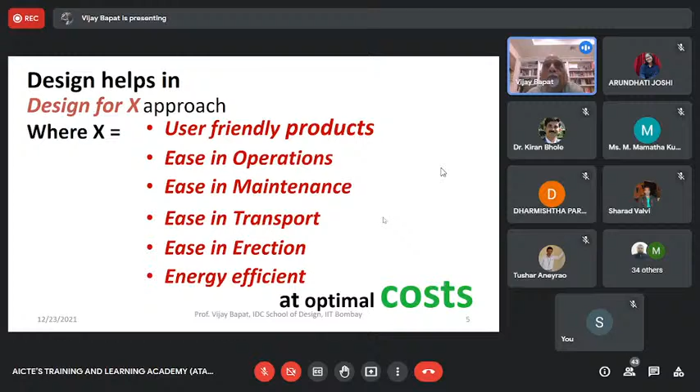Why is design and innovation becoming so important today? Let me talk a little bit about that. Because of globalization and e-marketing, now anybody sitting in any corner of the world can just click a few buttons and find out which product is available in Africa or a desert, identify this as a problem, and come out with a very good innovative product.

There is a crank, and there is a morse taper collet in the front, and this whole small gadget is to be mounted on a pedestal grinder.

Then you adjust the angle once, and the operator has to put the drill in the front and rotate the handles, and you will get a perfect, very sharp tip. Fantastic innovation.

But when we, the product design people, started looking at this, we said the human aspect is overlooked. This is working, this is phenomenal.

You have the proper gear ratio to get optimal rotation and all that, but the operator is far away and is rotating the crank, while the actual drill tip—the main focus point—he can't see because it is far away. There is a visual disconnect between the actual process and what you are doing.

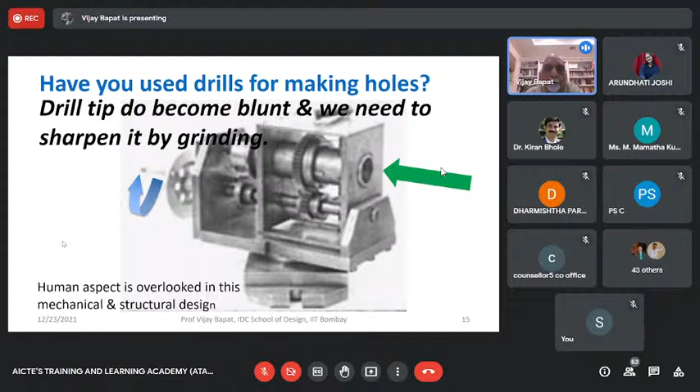So we started working on this, and design helps in developing products with added value—products that are aesthetically appealing, user friendly, and very simple to use.

So the same drill tip grinding that the design team worked on - now the whole machine is very compact. Instead of using the morse taper collet in the front, we adopted a self-centering chuck because many of our drills are parallel shaft. We brought the crank to the side, making it very easy to operate with a visual connection to what you are working on. Now this becomes a saleable product.

So I can say design is like an insurance policy for success. It will sell in the market.

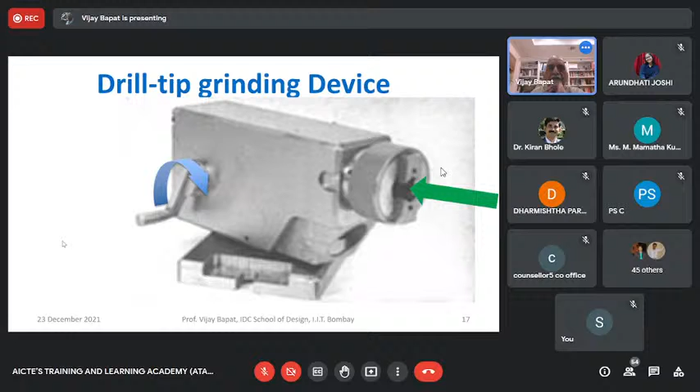Design and technology are inseparable. They are like two sides of a coin. If the rupee is to be a currency, it must have a head as well as a tail. If one side is missing, then it is a bad rupee, and only Amitabh Bachchan can use it, like in Sholay - you must remember that famous shot where he uses the coin for tossing. They have two sides of the same coin, and only then will it be successful. Your product will be successful.

I'm going to show you a very simple but important product: adhesive tape for medical application. We all use this sellotape. It's a wonderful product having a sticky surface on one side. It's made with plastic, but if sellotape is in a typical simple roll, then you need a cutting device.

Another problem with sellotape is that if you forget to put some innovative thing, like a matchstick or a U-clip, it's so difficult to locate your starting point. You must have a very sharp finger to find where it starts, and then use scissors or a cutter to cut it. It's a fantastic product, but quite difficult to use unless you take care to identify the starting point. But a small throwaway dispenser, just an injection molded piece, makes your life easy. Phenomenal - we use it day in and day out.

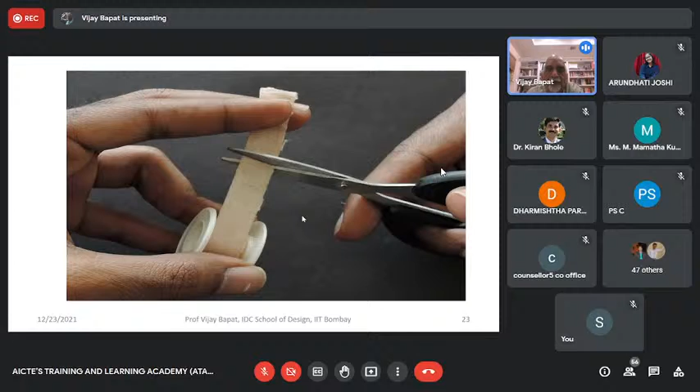So the problem was identified, and then another fantastic product was introduced for self-help: the band-aid. It's like a small piece, nicely packed - you just open it and put it on small cuts. But if the wound is big, you must rush to the hospital, where they apply medicine, put on cotton balls, and then put this cloth tape. That's the process used today.

3M company, a fantastic innovative company - they keep introducing products that make our lives easy. We know the self-sticky yellow note.

They came out with a fantastic product which is actually a paper-based product having thousands of micropores. You can just use your hands to tear it, and use whatever length you need. Very impressive.

But I was more impressed not by the micropore tape, but by another product: Transpore tape. Look at the cut possible - it gives you a clean cut. It's a plastic based product, but there are many holes.

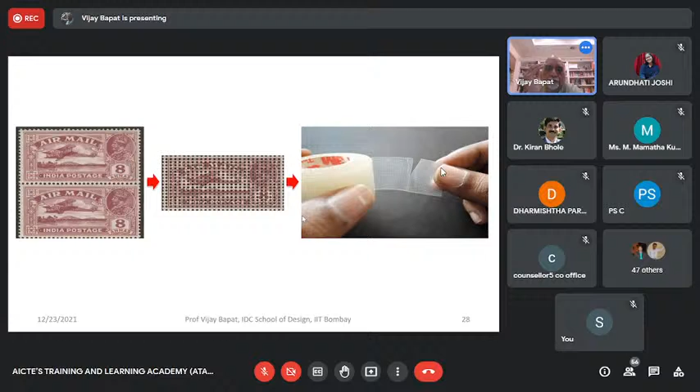Another example: till 2005, phones started becoming smarter, and we started using them for texting. My first phone for texting had key number one for A, B, C, key number two, and so on - you must all have used this type of phone.

To get C, you have to keep pressing the first key - one, two, three - and you will get C. But yes, it was allowing me to text.

Then BlackBerry came out with the QWERTY key. In this process, I went for that, but then I had to use a stylus or a small ballpoint refill to press the key. But it had all alphabetic keys, and it was making my life very comfortable.

Up to 2005, we started using smartphones. But look at the Apple approach. They are fantastic in using the design thinking process to come out with breakthrough products. Even today, in phones, in their software, many innovative products. Their computers are very innovative.

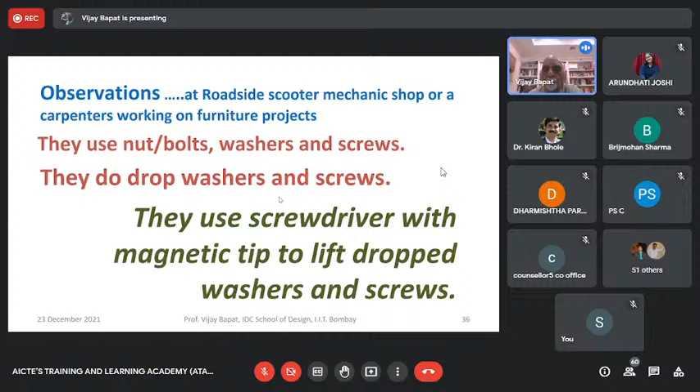So when I started looking at this, I said, can I innovate on this? This is fantastic. Why should only mechanics and carpenters use it? Can I make a product for the common person? So I started observing the problems with the screwdriver. A screwdriver is a big thing, not compact. I can't carry it in my pocket.

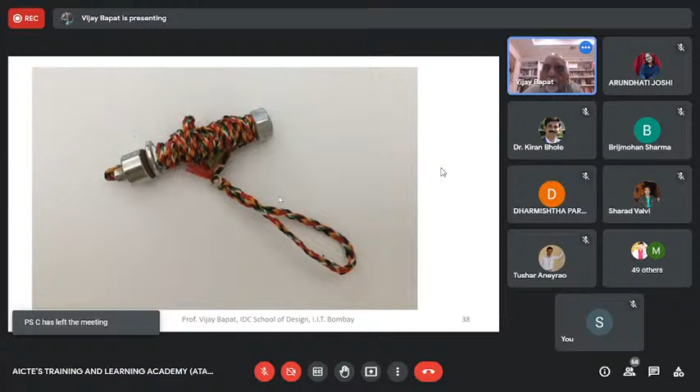So I devised a product. What I did: a thread attached with a very powerful magnet, with a loop on one end. Then I can wrap the thread around the magnet and carry it in my pocket. A fantastic product, and I was very proud of this innovation.

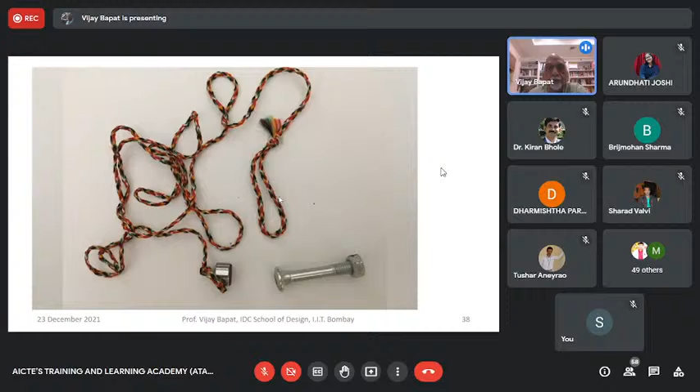For the last 20 years plus, I've been trying to sell it to people at all these types of conferences, and I failed miserably. Nobody is ready to buy. People are offering hardly 5 rupees for this. Many times they say, 'Why, sir, should I buy it from you?' My IIT brand is also not helping me sell it.

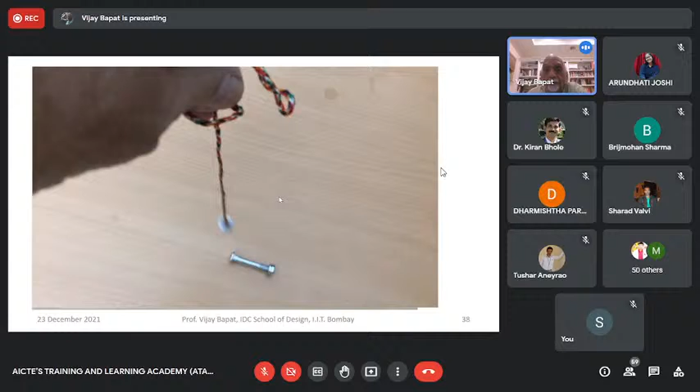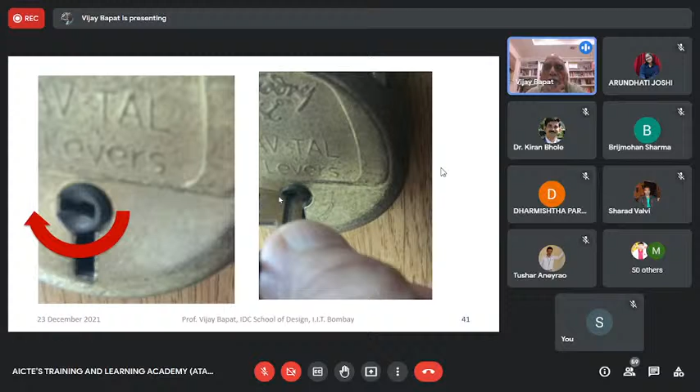People... I was trying to sell it saying opening locks is a problem. Look at the lock itself, the padlock, it rotates, and the ferrule keeps rotating. You have to insert the key in that small keyhole, and thanks to my lock designers and architects, I do drop my keys. So I said, this product is wonderful. If I have it in my pocket, I can use it for lifting dropped keys besides dropped ferrous objects.

Nobody offered me more than 5 rupees, and that's why academicians are not really business minded. I haven't earned millions of dollars on this product.

People also use the term jugaad. It looks like a jugaad. 'I can make it myself, why should I give even 5 rupees for this product?' It doesn't look like a product. If a product doesn't look like a product, it is not sellable. People will make it themselves.

Then, about 20 years ago, I was really impressed at this Kmart. I found one product which can be carried in my pocket like a pen. This is also a wonderful product, very similar to my contraption. It's nothing but an aerial fixed with a very powerful magnet. I can carry it like a pen, and it makes my life comfortable if I drop.

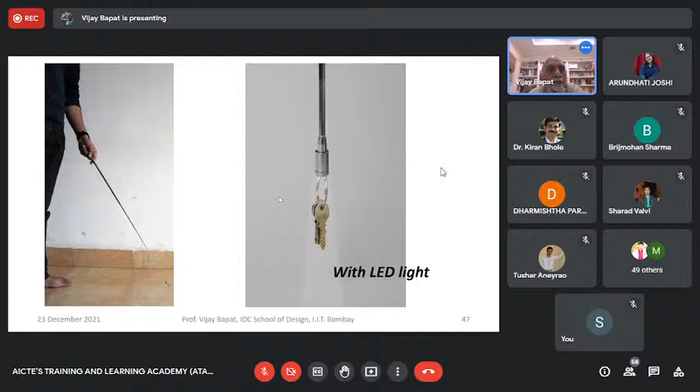I came out with another product. This I found in Switzerland. Now this is no more a very small, tiny, pen-looking product, but it's like a wand. When I open it, it's like a wand.

It also becomes a very powerful torch, and they are claiming that if you are taking out your pet dog for a walk, we all know how stray dogs and pet dogs have fantastic friendship, and I have to protect my pet dog. This helps me in protecting.

This is a wand, quite a strong wand. Even it can be used against vandalism, against robbers, and protect myself. Fantastic product.

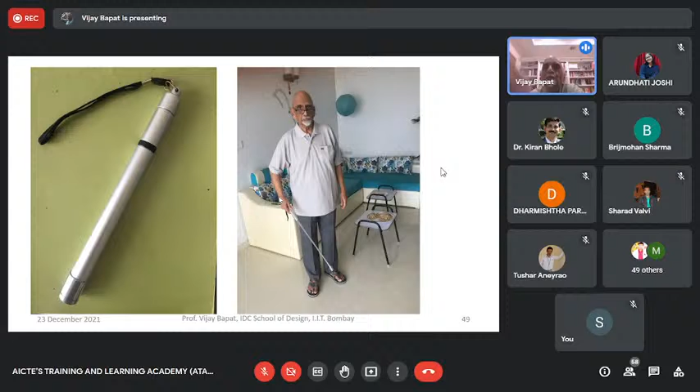Design thinking is used to develop further, improve it, and find out new applications.

Now look at the pricing. This particular image talks about people who were not ready to offer me 5 rupees for that thread and magnet, $5 for the basic product. Then you add light, $8, and this third product, which helps you protect yourself, is 16 euros.

And that's the power of design.

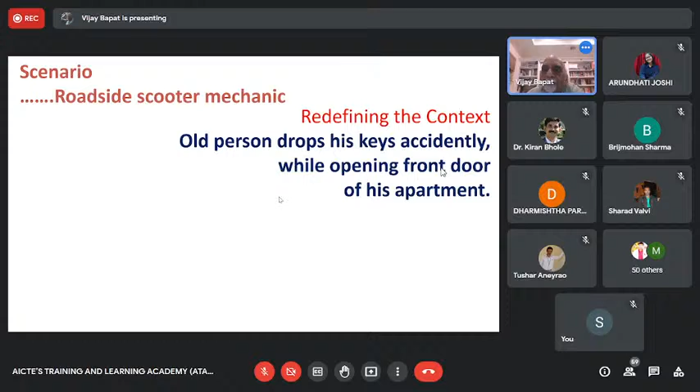Of course, the whole story started with the scenario of the roadside mechanic. But we are redefining the context. We are saying old people do drop their keys, and this particular product is called a dropped key lifting device. A very sophisticated looking product which one can be proud of carrying in the pocket, and that's the power of design thinking, or design.

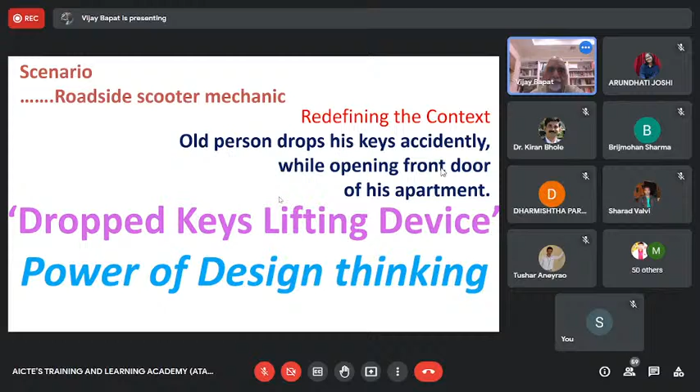So we were talking about user-centric product, and I showed you a few examples also. I hope you are getting more and more understanding about the user-centric design approach.

Now let me further elaborate on understanding the user. I'm dividing users into three categories: primary, secondary, tertiary. And to open up discussion, I'm just taking a very simple product.

Every kitchen now, this product is a must besides our gas stove to make life easy for wives who are spending time preparing food, cooking, and then serving. Fantastic product. Instead of the khalbatta, no, this is a standard product.

Am I audible? Yes, sir. Yes, sir. Yeah. Yes, sir.

Mixer and grinder is something you will find in every kitchen. Let me tell you who is the user. The primary user is a housewife. She is interested in making chutney and grinding dal and all that. What are her point of view requirements from the mixer and grinder?

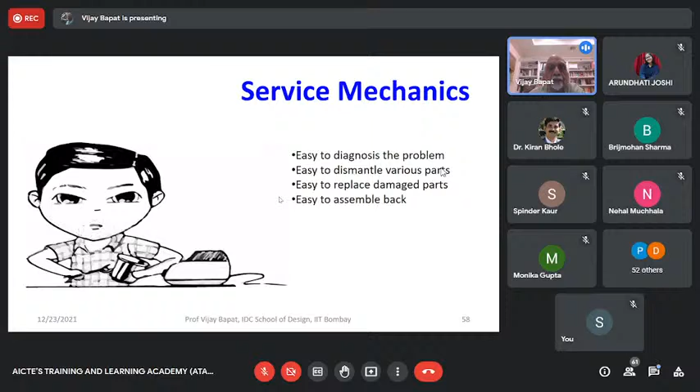And the last product, actually, Indian philosophy of selling it to Kabadiwala, and I'm really proud of this approach. We never throw newspapers even. We collect all newspapers for a month or two and then sell it to Kabadiwala, and then it is recycled. This green design, which all these developed countries have started talking about, we were already using. This was our habit for generations. Kabadiwala was a very common person in our life.

He used to come to my house to buy newspaper, glass bottles, and even the mixer and grinder. Now, from his viewpoint, it should be very easy to dismantle. In fact, my electrical friends must design the motor so that Kabadiwala can take out the copper wiring, because copper has the maximum sale value, isn't it? Kabadiwala - it's like designing for cradle to grave, from the point of manufacture to the point of dismantle or after-life.

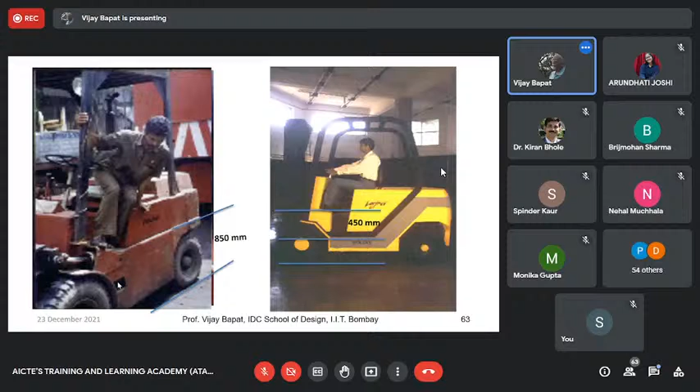Then, as I discussed earlier, we started looking at the chassis from different users' points of view - the mechanic, maintenance, and service people. I came out with six different chassis designs. These are not engineered, let me be clear, but these are ideas which would make the maintenance guys' life easy or make assembly easier. When I presented it, management said yes...

But then they said, sir, please don't ask us to redesign the chassis, because redesigning the chassis is a lot of engineering. Today, of course, we have FEA and all that - tomorrow somebody is going to talk about FEA, and these are wonderful tools. But 20 years ago, it was quite difficult. So they said, sir, don't go for all this - these ideas are phenomenal, but it's impossible for us to reach our manufacturing goal, because they were talking about introducing the new design as a product of the millennium.

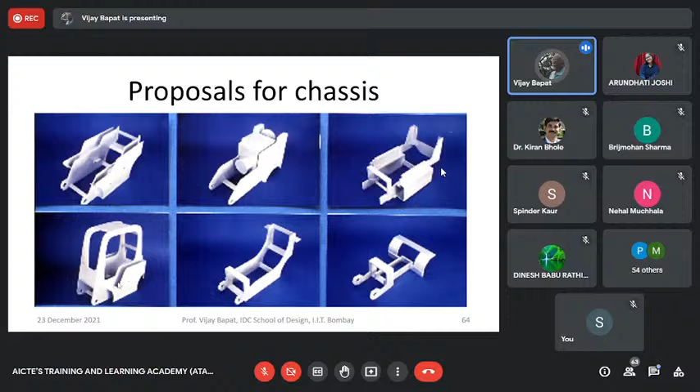Minimal changes in the chassis - so the challenge was like packing old wine into a new bottle. Then we still came out with minimal changes.

Then they actually made one of their chassis and sent it to IDC - this is in between IDC and the mechanical department. We made a thermocol body which we kept on that chassis, which fitted perfectly and still gave you the carved out seat, carved out step. Can you see the step here, which is visible from the top? We were happy.

We actually interviewed another 20 drivers. They visited IDC and said this is fantastic to climb up and climb down. So this design was taken forward - during that time I chose red, black and yellow colors - and this was introduced as the product of the millennium, in December 2000, with big fanfare, bringing comfort for the driver.

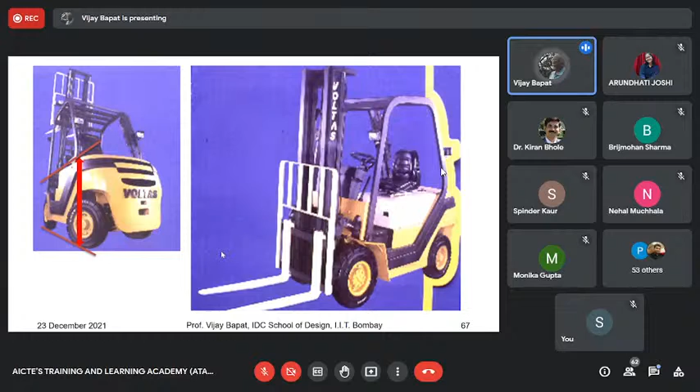The basic important point was the step. The outcome of this design was more than just making it a good looking, sellable product in the market - let me elaborate on the outcome. Now I'm going into a bit of the technical side of aesthetics.

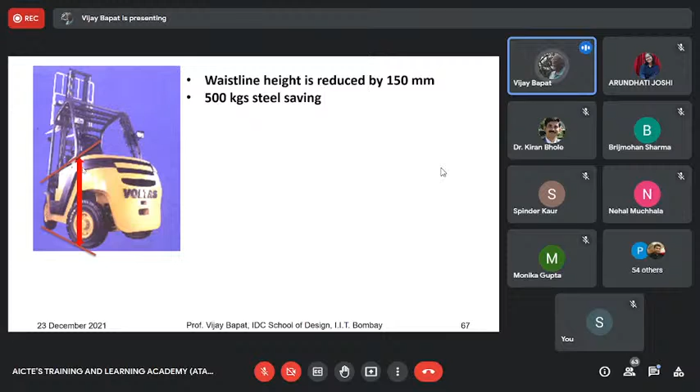This is called the waistline, and this is the ground line where the wheels are touching, with the waistline in between. The waistline height was reduced by 150 mm - like chopping off 10, 20, 30 mm of steel plates. This resulted in net weight saving, and climbing on slopes was improved.

So instead of reducing the price, companies put a premium on this forklift truck. They started exporting it. This is now almost like a 5-star product.

You must be aware of this star rating. All our ACs and electrical products have started giving you a star rating. A 5-star rated refrigerator or AC is more efficient. Efficient means energy efficient - it will save on the energy bill per year. But in turn, because of the technology, they are selling it higher. A 3-star AC is cheaper than a 5-star AC. Like that, right? Here, every month I'm going to save on fuel.

Yes, companies started charging a premium for this. They started exporting it with a 500 kilo weight saving.

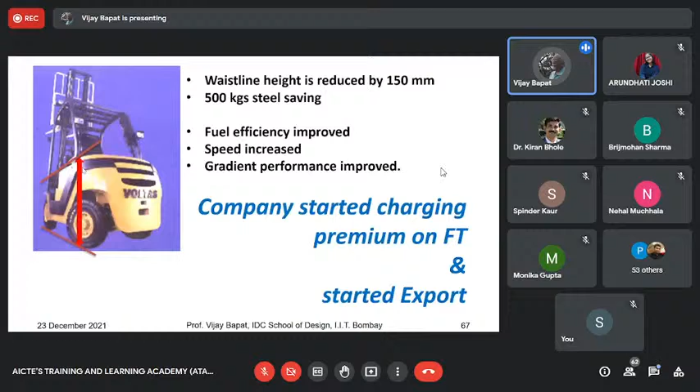This is how the final product on the road looks like. Even today, you will find this type of forklift truck. The Voltas forklift truck, I heard it was taken over or sold to some other company, but I'm not sure whether they have changed the design or they are continuing the same design.

In design language, we call this a signature of a designer. If you look at this overhead guard, it has continuity, and that is Bapat's signature. So if you come across any Voltas forklift truck having this type of overhead guard - this is a 10 tonner, the earlier one was 3 tonner - they extended that across the full range of their forklift trucks. You will still see this product in the market.

So if you see my signature, you can say that yes, Professor Bapat gave us the lecture on product design.

Another product I developed was for Crompton Greaves. They were very near - they are very near - of course, because Crompton has sold off their land now. At Kanjurmarg, IIT is at Powai.

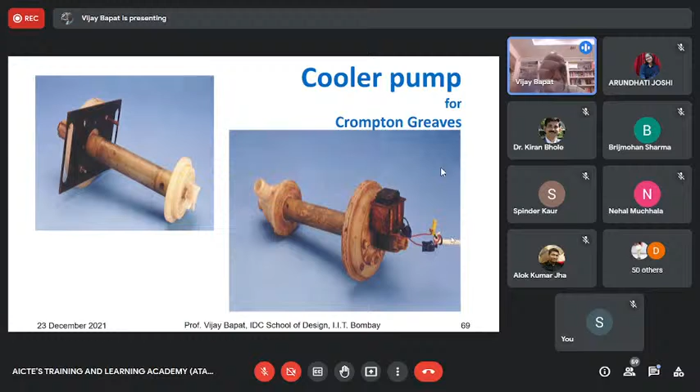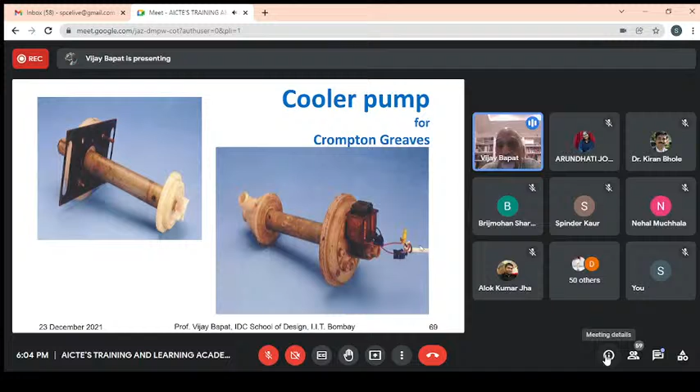So we said, fantastic, go ahead for production. But the Vice President, Mr. Noria, said, 'Professor Bapat, what do you think about this from a design point of view?' I said, yes, from a functionality point of view, we have achieved our goals. But from a design point of view, can you comment? He really asked me to comment from the user point of view or design point of view.

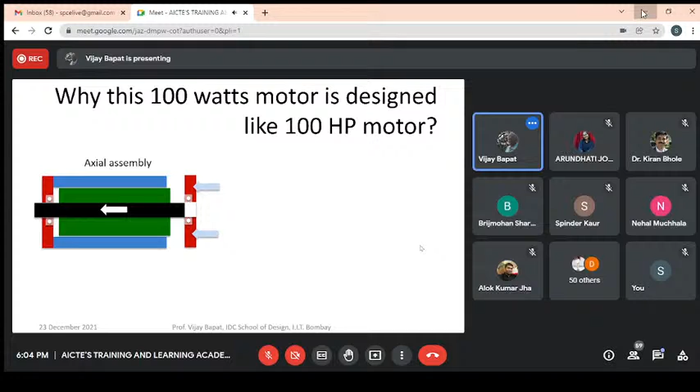And this was my question in that meeting: why is this 100-watt motor designed this way? Most of the time, if you notice, there are axial assemblies - a rotor assembled on the shaft that you push in the axial direction to assemble, with a cover and bearing, making a very solid flat motor. But the approach was to design it as an axial assembly.

They said, what do you mean? And this was my sketch during that meeting. I said, can we think about a radial or side assembly instead? This is the sketch I drew in 5 minutes during that meeting.

They said, can you develop it? Our deadline is just 3 months down the line. We want to introduce this in the market.

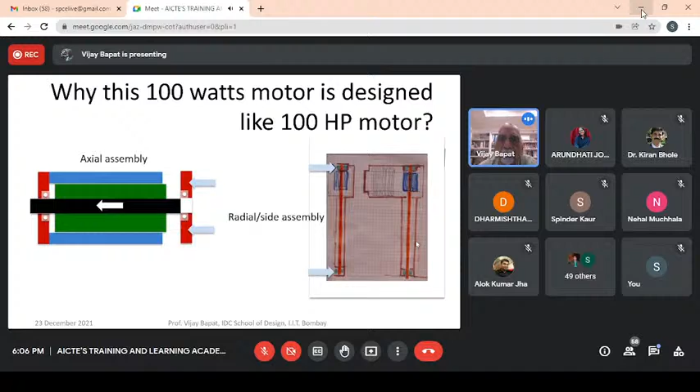In 3 weeks' time, I worked on and developed a product, which is side assembly. I made a working prototype using polycarbonate. I perfected the assembly technique, and because the motor runs at quite a high temperature, I made it in polycarbonate. When we tested it, people were really stunned to see the results.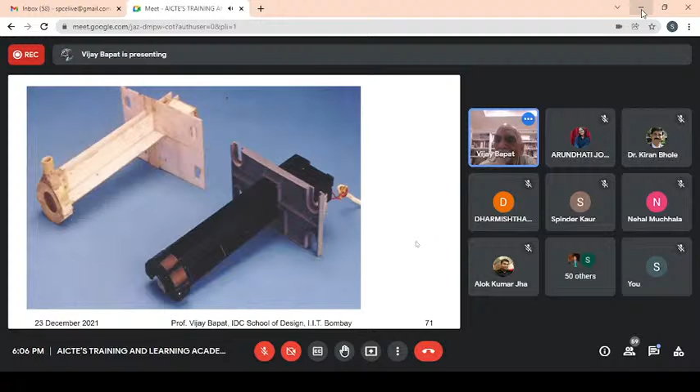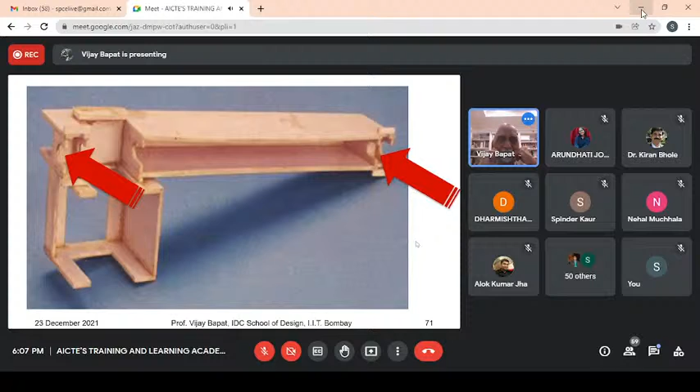So this is what my sub-assembly is about. Shaft, permanent magnet, my winding is actually assembled before the whole thing gets side assembly, and it is like a snap fit. We use a spring.

Now look at these new design features. We could achieve substantial component reduction from 34 to 19, almost 45 plus percent reduction. Plastic injection molded body components are released.

No screw. Assembly is based on snap-fit. Cover acts as a heatsink. Very unique concept.

The aluminum cover is touching the stamping, and because of that, the inside temperature reduces from 103 to 88 degrees centigrade.

Immediately, the copper wire used for winding can be a cheaper wire, because that copper wire itself is given a coating to make it insulated. Otherwise, if I just put a plain copper wire, it will not work as a winding. They could reduce the cost on copper wiring because the temperature came down.

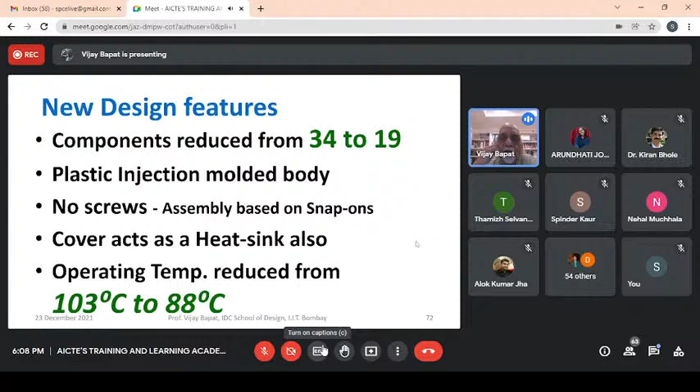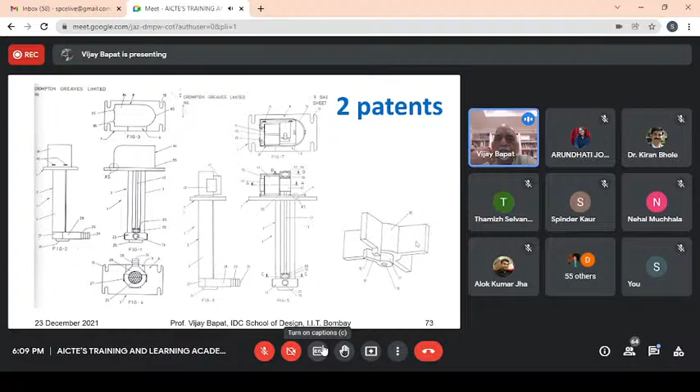One more product, and I'm really proud about my contribution to this Sigma 3 product. Now, what is this Sigma 3? Electronics Devices, they are leading foil sealing machines. I will elaborate on what this is.

They were working on the next generation Sigma 3 product, which is having self-diagnostic and IoT ready capabilities. Now, my friends, you know about IoT and the industrial revolution coming, number four, and all that.

Because this company, Electronics Devices, exports this machine, it is very popular even in Germany, the US, and other countries. And when you export a product, it must run.

So can there be a self-diagnosis, so that people sitting in Mumbai can look at the health of this machine and know which part is going to fail? So can you dispatch the replacement before the machine actually fails?

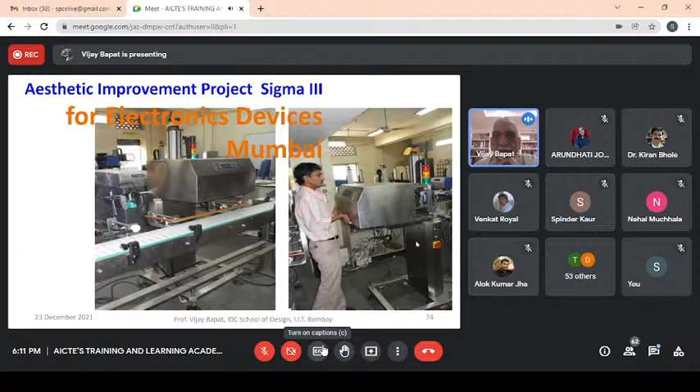Now let me elaborate on what this foil sealing machine is and how it works. So there is a conveyor belt, and on this conveyor belt, bottles are moving.

Now, what is this foil sealing itself? When you open any medical capsule bottle, or pickle bottle, or Nescafe or similar product, there is a foil.

This foil helps keep the freshness of the inside content. It will not get oxidized, and the shelf life increases. Otherwise, it might go soggy or become rock solid. The pickle will become bad; my capsules will absorb moisture and become soggy. So all my pharma bottles and food products have a foil.

Now this foil is protecting the inside content and also acts like tamper-proof evidence. It allows me to know that nobody has used it or misused it during the selling process. I'm getting the packed product, and nobody has taken out one spoonful of coffee during transportation and selling. Yes, foil is becoming a very important product.

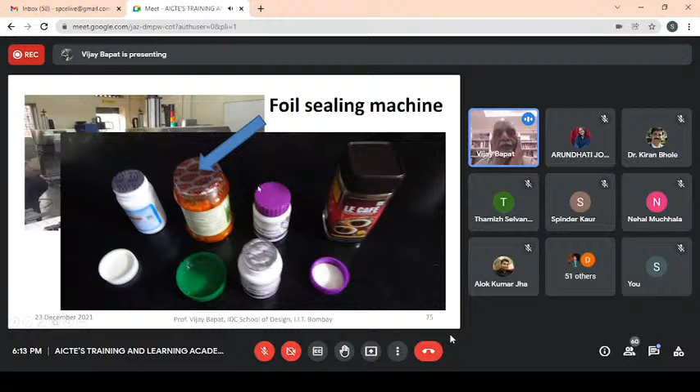So in the production line, there is a filling station, capping station, and this foil sealing machine, which is nothing but an induction sealer. When at the capping station you are inserting the cap, which has foil inside, but it is not sealed.

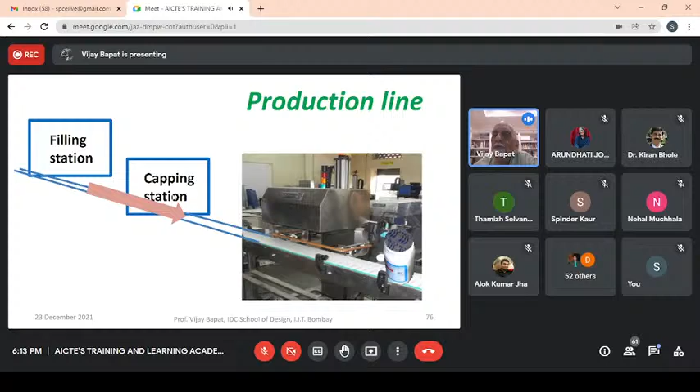Of course, here I have removed the cap just to show you that this is how it gets sealed.

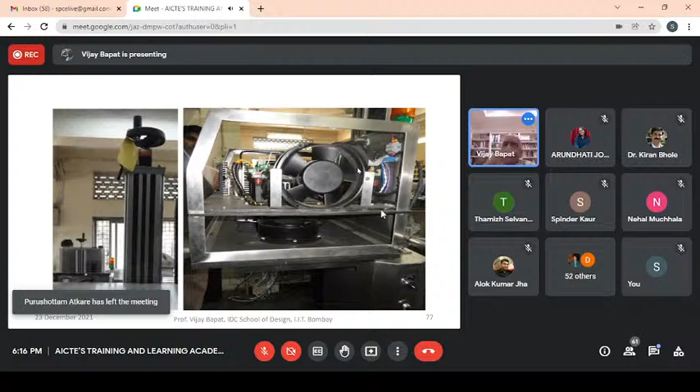So I started talking with people there, manufacturing and designing. I started talking with electronics people. Why this component? What is the function, and why is it designed in this manner? Can I shift this to this place? And all those crazy questions.

Now, during this, my visits to their industry and even at the consumer end, one observation.

And that observation - now a designer is actually trained to keep on looking at the problem area or would-be problematic area, because we are actually designing it for success.

It must work, because if this machine stops, everything stops. That 1 million tablet press also must be stopped, because I can't stock those tablets.

So one observation - somebody has left a paper cup. Of course, I'm holding the glass as a paper cup, but there was a sip of tea left.

That gave me the idea. I said, oh my God. Our mentality is to use a horizontal surface for keeping things.

So somebody must have left a teacup there, or paper, even water.

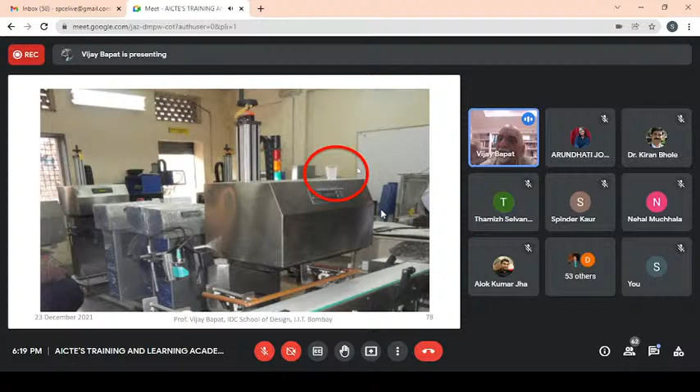So I said, oh, I must design it in such a way that it can't be misused for anything else. So I started developing shapes which are sloping forward.

And we gave a slope in such a way that if somebody leaves a cylindrical pane, it will fall, but it will fall away from that conveyor belt.

Now, if it is sloping, then I can't keep my glass, right? So, discouraging people from misusing it is a very important consideration.

So this was our final shape, which was approved by the people, top management. Another observation.

From cradle to grave, even the transportation and all that I have referred to earlier. Now this is the machine ready for delivery.

And their industry is in a typical small scale industrial gala, typically based in Andheri itself, Andheri West I think. So this is a typical delivery bay of a small scale industry, and you can see a machine packed into a wooden crate.

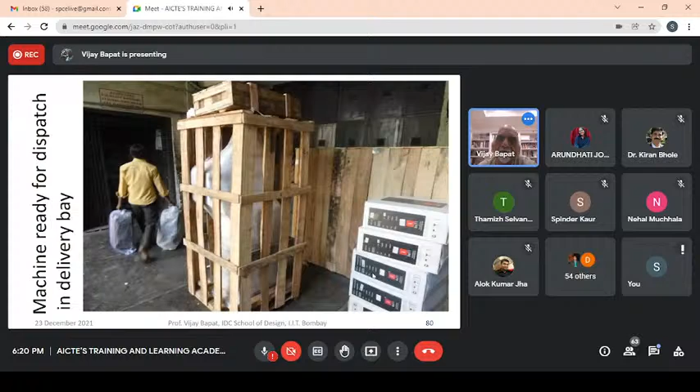We use one very powerful technique, my favorite way of creativity - connecting the unconnected. So when I looked at this picture again and again, I said, oh my God, this is a million dollar shot. Let me elaborate, and it immediately lighted the bulb. In cartoons, you must have seen whenever a cartoon character gets an idea, it is shown as a lighted bulb.

Now let me elaborate further. What is the problem? The problem is the whole machine is packed, ready to dispatch in a wooden crate. Somebody will say, why is wooden crate a problem? We do use wooden crate for transporting. But if you are exporting it to Germany, sir, you have to really follow their laws. They don't like to import machines packed into wooden crates. If you are exporting, you must have a fumigation certificate - fumigation means removing all fungus from the wooden battens used for manufacturing the crate. They don't want to import free fungus. And wooden crate means you have to employ an agency to collect this wooden crate for recycling. They are very, very critical on this aspect, and in India, fumigation is more costly than the cost of the wooden crate itself.

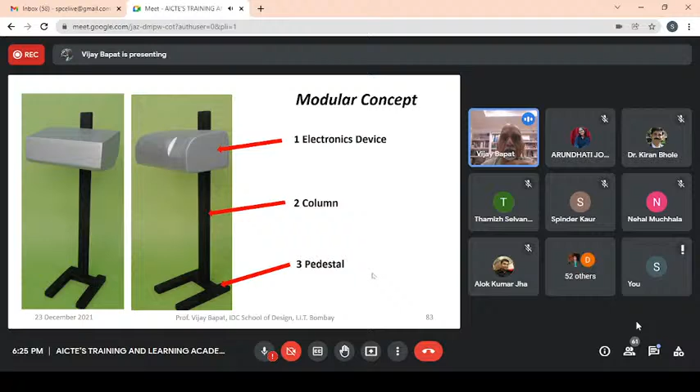Now, of course, when we decided to give the different components in three different boxes, it pushed us to redesign even the assembly approach and everything. So we said it should be very easy to assemble by a single person at the site where it is going to be used - single person assembly, very easy to assemble.

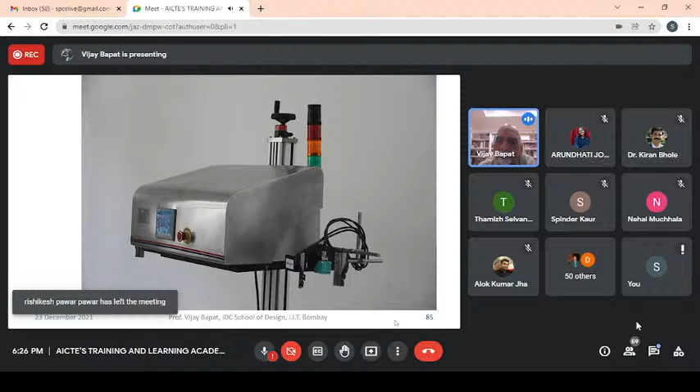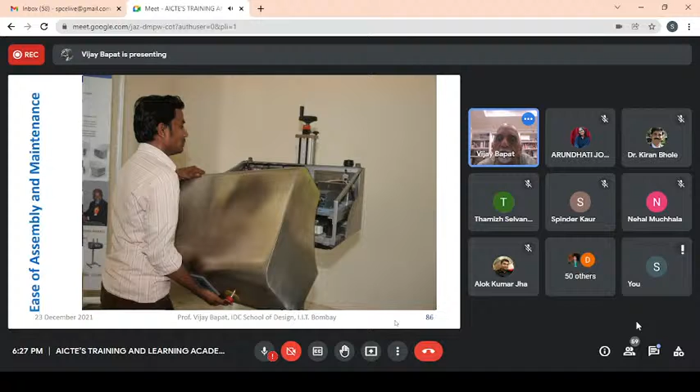So this is how the machine looks like finally. There is very nice cooling, air cooling entry, and all those aspects taken into consideration. This is how it looks in the front view - ease of assembly and maintenance. Maintenance is important because it's a machine. Two screws for disassembly - you unscrew two screws, it rotates, then you remove the two wires going to the main switch and to your display. You can lift the top cover very easily, and the whole PCB, the whole assembly, is available to you for checking which particular component has gone bad.

Now if you look at this, all the taller components - transformers and other tall parts - I requested the electronics people to push them to the back, like soldiers standing in a disciplined manner, tall people at the back, shorter people in the front row. Because I was interested in achieving a forward sloping design. Of course it was a lot of work redoing the circuit and everything, but the company liked this whole approach and really took efforts in implementing the whole design.

Now look at this Sigma 3 touch, as they call it - the machine design features. The machine is made compact by reorganizing internal components, leading to better aesthetics. Because it's a global product, it must have good aesthetics and be easy to use. The forward slope makes it dynamic, and most importantly, prevents misuse - the top surface can't be misused for keeping anything since it slopes forward. That was the main contribution.

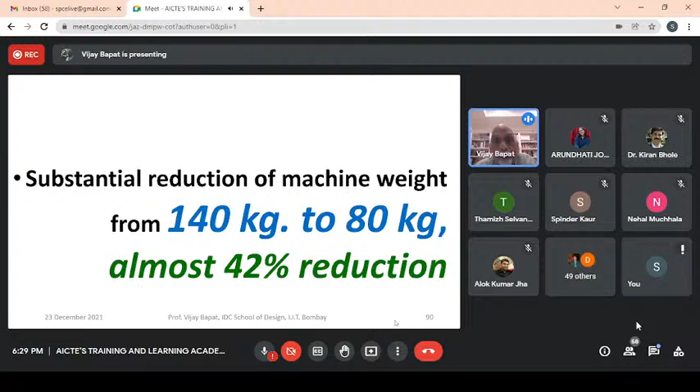Packaging and transportation is now very much simplified. I'm using paper corrugated box with the modular concept instead of wooden crates. No problem in exporting it to Germany now. Look at this freight reduction. They were exporting it to US FOB New York at $1,250 earlier. Now it is only 300.

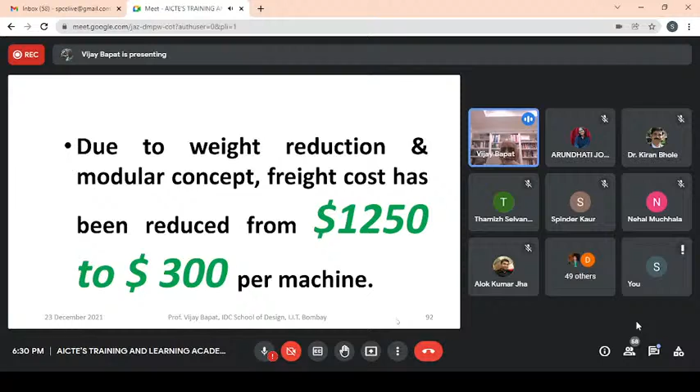Because of all these and their technical performance, it bagged the prestigious Pacmachine Award 2013. The owner is receiving that award, and it was even displayed at the IF exhibition in Germany. My client is more than happy. The users, the mechanics, they are happy because it is easier to maintain, easier to use.

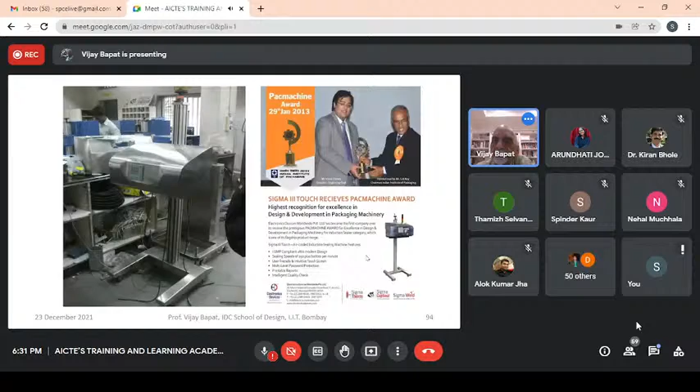Now I'm almost coming to the end of my lecture so that we can take some questions and discuss it further.

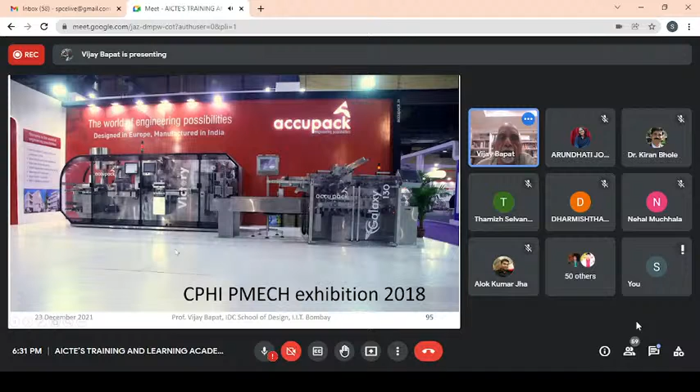In this other product, the client has exhibited at the PMECH pharmaceutical machinery exhibition at Goregaon in the 2018 PMECH exhibition. There are two machines. This is a tablet packaging machine, a blister packaging machine, and this is actually a cartoning machine. They have used a tagline saying designed in Europe.

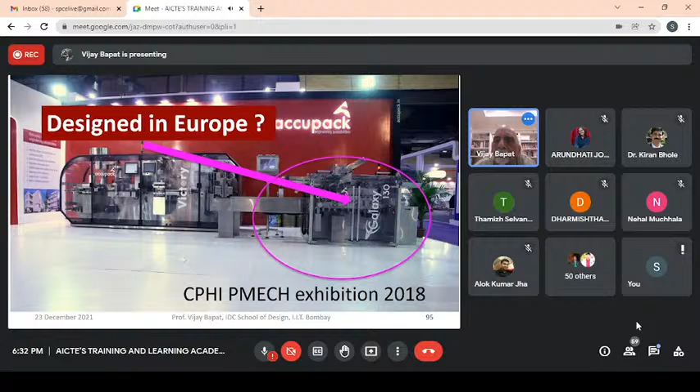When I ask people during this type of seminar, or anybody, people say the first machine must be designed in Europe and the second machine must be designed in India. But let me clarify. This was designed by an Italian firm, of course, it was a total technology development. They have not really done enough effort in improving the look.

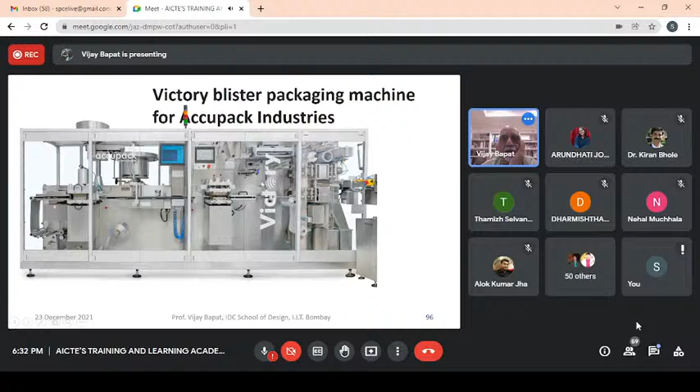My contribution was on the first machine, the blister packing machine. This was their original machine, and you can see the change. The total personality of the machine is changed because of our contribution.

In one exhibition, they got so many orders they could increase the price by 10%. Next 3 years' orders are booked. It is selling really nicely in the market because now the machine tells how efficient it is, and its first look itself must have that expression, that yes, the machine can deliver. That's where we have to change from making or selling what we can make to making what we can sell.

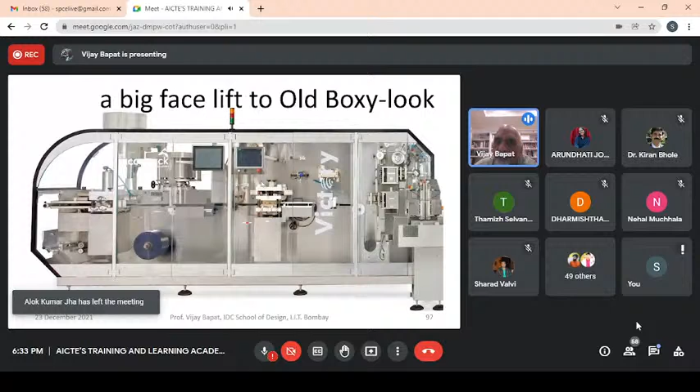Now, this particular approach I call imagineering. Of course, this term is not mine. Alcoa, one of the largest aluminum manufacturing companies from America, they have coined this term: imagineering, imagine engineering. It's like free imagination. Imagination is the key for innovation, and that's what I preach and use in my professional life.

So, my dear friends, you are on the very challenging voyage of innovation and design. 3D printing is going to help you in innovation and help you in making the products workable. But look at the future, it's going to change. We have to rewrite our engineering and manufacturing books, it's going to change totally. So you're on the road of innovation and design, and you have taken it as a challenge. It's a voyage. Shubhaste Panthana. Have a successful life and a safe journey.